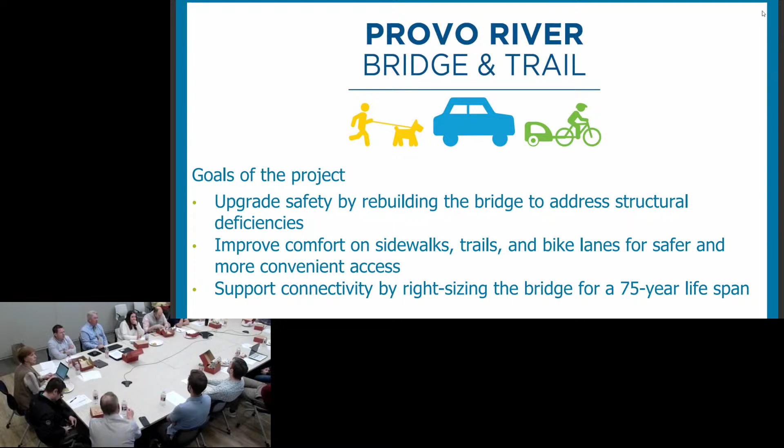So let's get a little background on the Provo River Bridge itself and talk a little bit about our goals. Of course, our goal is to improve safety, right? We have a structure that's deficient and that we need to improve before it falls down. We do need better sidewalks, trails, bike lanes and connectivity. That will improve as well, and we'll talk about some of the deficiencies that exist now. Then we want to right-size the bridge for the 75-year life cycle.

Here's what the Provo River Bridge looks like today. You can see that it is older. Sidewalks are narrow, the parapet's shorter. There are some issues we'll talk about. Constructed in 1960, it's about 80 feet long, 40 feet wide. We took our counters and our average daily traffic is just a little over 11,000, so 11,300. Design life for this bridge is somewhere between 50 and 70 years. We're at 65.

So we're right there. The National Bridge Inventory lists four deficiencies associated with this structure. We have the transition standards, which everybody is very familiar with, the approach guardrails, the bridge guardrail ends, and then deck geometry also is deficient. So we do have some standards that we need to fix, and of course, since this was built in 1960, bridge construction standards have come a long way.

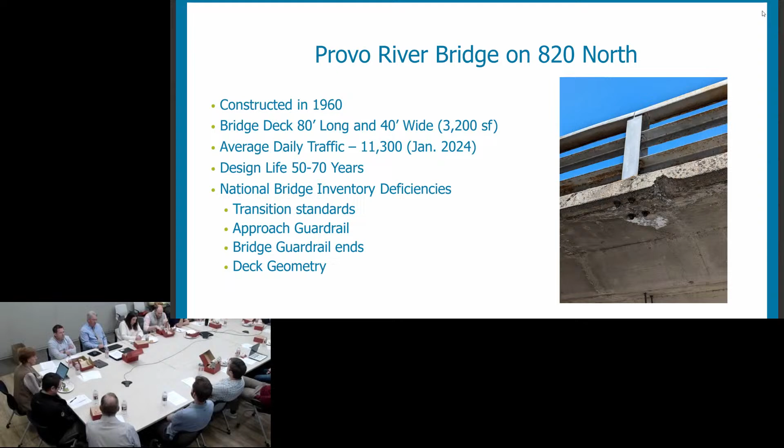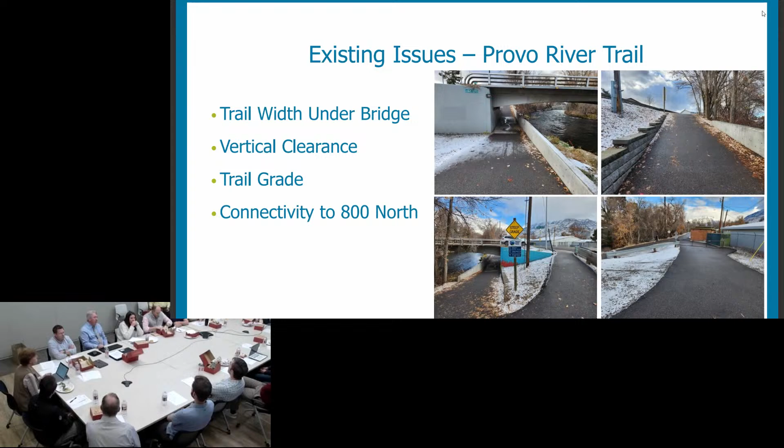Our existing issues with the Provo River Trail: those that use this will recognize that the trail is at its narrowest point when it goes underneath the 820 bridge. The trail is about 8 to 16 feet, depending on where it's at, from the lake all the way up to Provo Canyon. But in this particular case, you can also see the vertical clearance is not good. The trail grade coming up and out of there exceeds the percent that we try to be at, which is less than 8%. And our connectivity to 800 North is not great. So we want to improve those things. Up on top, our sidewalk width is narrow.

Everybody's very much aware of that. The connectivity in a couple locations, especially on the northwest side, does not have any connection whatsoever on the sidewalk. Bike lane width is not meeting our AASHTO standards of 6 feet. Parapet height is low, so someone that's top heavy like me certainly could take a plunge very easily. Weight limit, okay, I'm not there on the weight limit, but anyway, the 31 tons is sufficient that way.

And then sight distance, and I think that's what most people are familiar with, is the sight distance issue. We got a lot of things to balance here. I think Dave's going to talk a little bit about this in a little bit, but between the river itself and not altering the stream, and being able to get the bridge high enough where we have clearance underneath on the trail, and get the bridge where we have good distance and view, all those three things kind of conflict, and there's a couple other things that go with that.

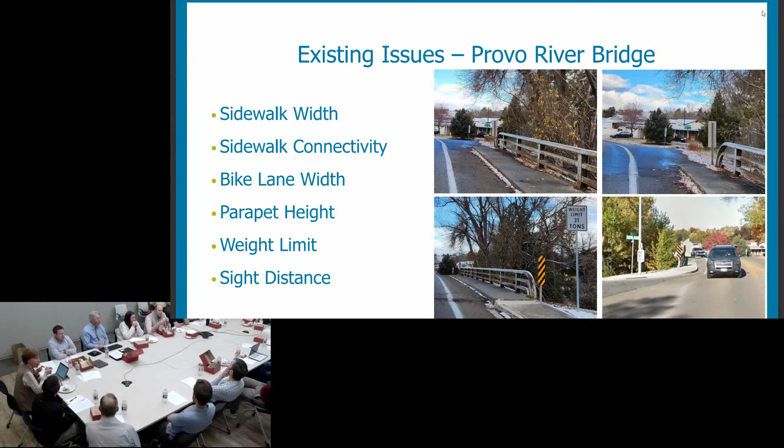So with the sidewalk width on either side of the bridge, there's a total of 5 feet of concrete. But the outside 15 inches is taken up by that big steel parapet. And so the sidewalk is really only 3.5 feet wide. You can't walk next to somebody from there. And then it doesn't connect at all. Like that upper right-hand photo is the northwest side where the sidewalk is. Connectivity. Yeah.

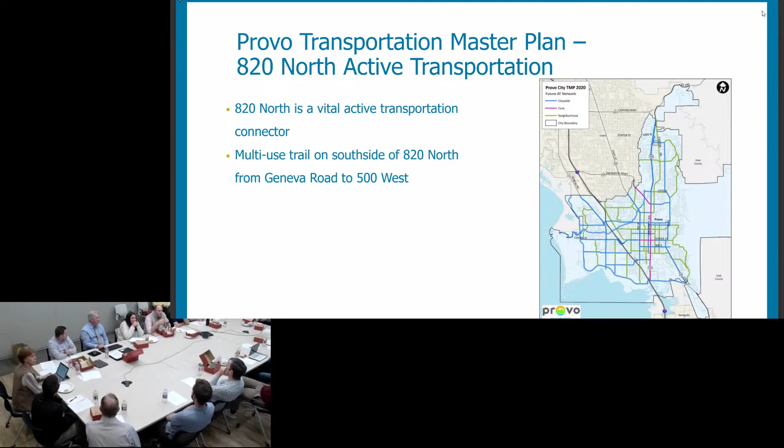Everybody enjoys the Provo River Trail. It is one of the gems of Utah County, right? Not just Provo City, but all of Utah County. It's a gem. And we need to improve that trail through this bottleneck right here. By the way, this section of the trail has over 200,000 trail users a year. It's probably somewhere between maybe 210 and 250,000. Last year, crossing the bridge, we saw about 200 to 210,000, and that was an increase of 23% over the year before. So from '22 to '23, we saw a 23% increase in trail users on this section.

It's a huge number. Thomas, why don't you go ahead and talk about our active transportation users across the river bridge? Yeah, and so the 200 plus thousand are just on the trail right here. And then 820 North itself connects so much from the east to the west, and it has over 100,000 annual users. I don't know the exact number. We've done some counts and we're interpolating it up, but it's a lot. It ends up being about 300 plus a day, and we multiply that times 365, we get about 100,000. But I feel very confident in that number, that there's 100,000 users, bikes and peds, crossing the bridge every year.

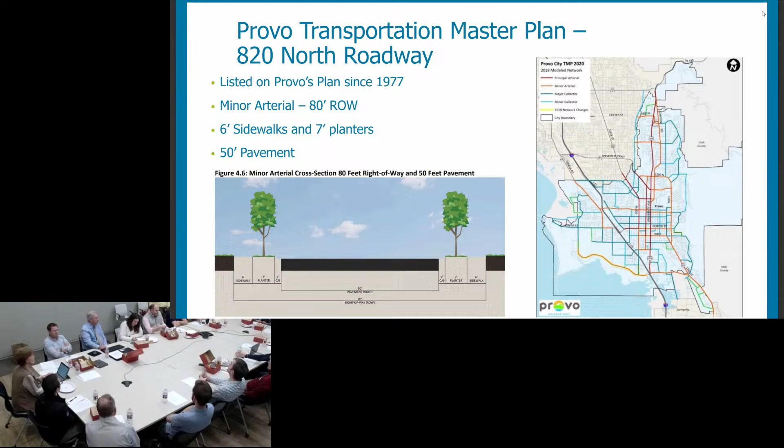So in our transportation master plan, we do have a capital facilities section on 820 North from 5th West to University Avenue. That is planned to be widened. And I will tell you, inflation has taken a hit on us. We've only implemented 20% of our transportation master plan since 2020, when this was adopted. One of the reasons is there's been other priorities in the city. We have a wonderful new airport. We have an epic park that's about to be opened here this fall. And when we see things like that, there's sacrifices that are made. And then inflation really is also a big hit, right?

Some of the bids we're seeing are coming in way over the engineer's cost estimate, even with 25 to 30%. So it will remain in the capital facilities plan. That's the first segment that really needs to be widened. When we get to the rest of it, you'll see 820 North, 950 West to 800 West. That's the bridge. We have funding for that. And then finally, 820 North from Geneva Road to 500 West. That also has a time frame to be determined for widening, but it's way in phase 2. I'll show you in a little bit when that starts to be really needed for increased volume. So, yes, on that one.

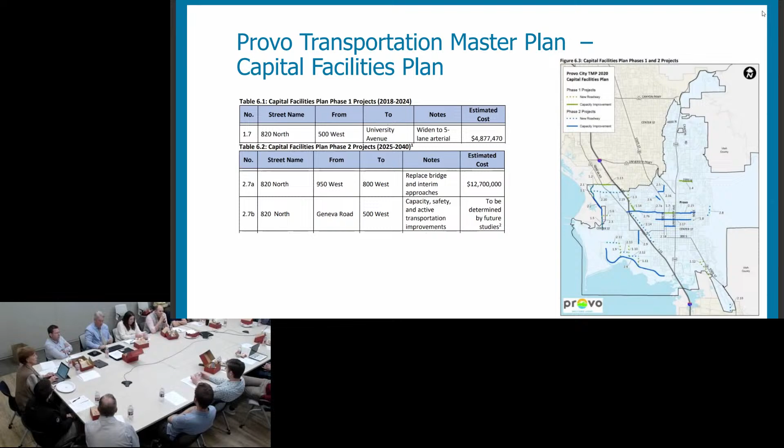So if we go and talk a little bit about the Provo Transportation Master Plan, back in 2000, we developed a plan with livability street standards. And no one else was doing this at the time. In fact, I know no one in the state of Utah that's adopted livability standards in their transportation master plan. They just go by the ITE trip generation. Salt Lake City has it, but they're not part of their master plan. It's a separate little document.

So we explored, we took videos, we tried to show the council and the planning commission at that time what different levels of service looked like on a local street. And the council adopted that, and 1,400 to 1,800 trips per day was deemed acceptable on their local streets. What they did get into a little bit was the arterials. The collectors, we do have a lot of homes fronting on collectors, and we do on arterials too, but the arterials have been there quite some time.

This arterial, 13.5, okay, is the livability street standard for 33,000, right? And so depending on whether that's a major or minor arterial, it really jumps up. And when we look at access spacing, that is really what determines the conflicts. Do we have a lot of driveways? Do we have a lot of public streets, every block accessing 820 North? Or is it limited, like Lakeview Parkway will be?

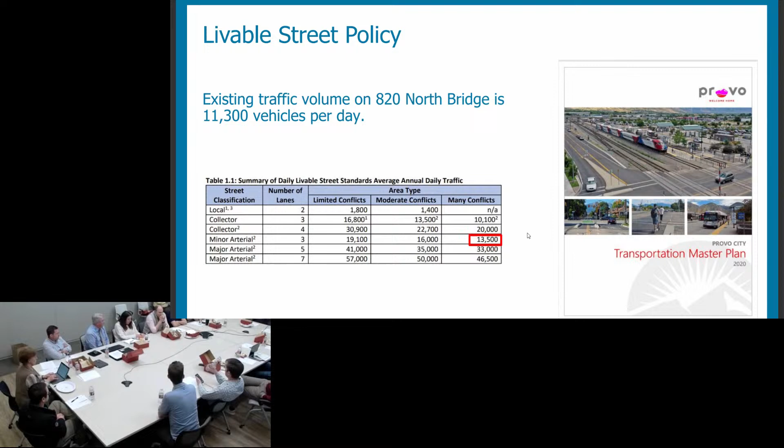So, the big question a lot of people want to know is, what's our traffic growth? What's happening on 800, 820 North in those locations? So, we did traffic counts recently in January. We're over 11,000 vehicles per day, and that's right here at 2024. Growth is continuing to occur on the west side. We have upgraded our sewer system over there, and we're upgrading our sewer treatment plant. And we just put in a lift station over there that will really catch most of the entire west side of I-15. There's going to be growth, and there is growth occurring.

So between Center Street in Provo and 2000 North in Provo, or 2000 South in Orem, the only access under or over I-15 is currently 820. So where are these people going to go? Actually, a lot of us avoid it, and go north or south, and we don't even come to Provo. Some go north up to Parkway, but we all know what Parkway is like. Or some take the back road south up to Orem Center and spend all your money in Orem and not in Provo. And unfortunately, we all know what Center Street design looks like, right?

So when we get up to about 2030, we're probably looking at some livability street standards and pushing the envelope there. 2033 is phase 2 of MAG's long-range plan. Without an interchange, this is kind of the growth that we see with the 5-lane facility. Stays fairly modest, keep it around 20,000 up to 2050. If UDOT, who is yet to do their environmental analysis, decides that 820 is the location to put in the interchange, this is the traffic volume that you experience.

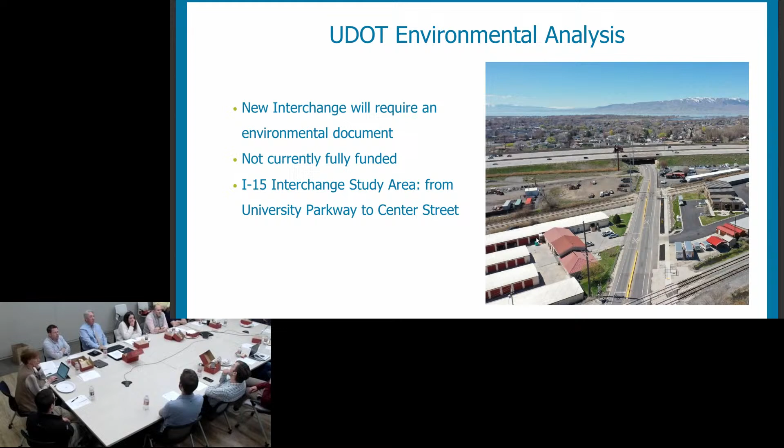So with that, I'm gonna turn it over to Dave, and he's gonna talk a little bit about potential cross sections. So, like Vern showed at the very beginning, this is a prettier picture of what the existing bridge looks like right now. We've got 30 feet of asphalt on top of the bridge, 5-foot sidewalks with 15-inch railings. There's not a lot of room to play with right here. We're well aware of the deficiencies that we're facing here.

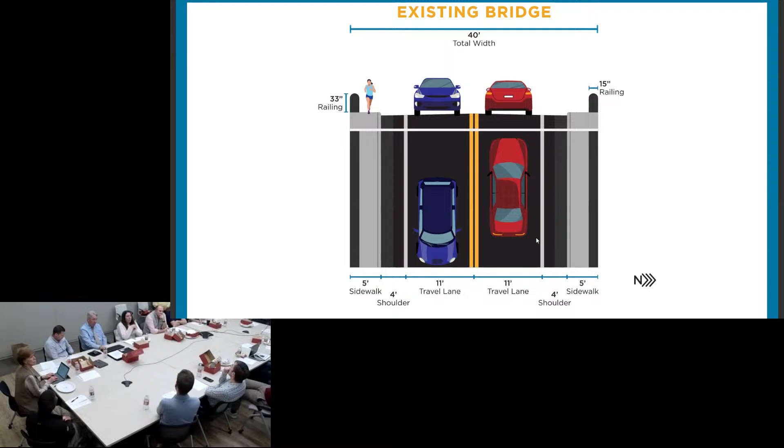If we were to build this size of bridge, in the case of future widenings, we can go to the next one, a potential occurrence may be that we would utilize the remainder of the bridge for 5 lanes of traffic, and be in the position to sacrifice active transportation to prioritize vehicle traffic.

And this would be putting 10-foot lanes for all the travel lanes through here. Why do you need a two-way left turn lane? What's that? Why do you need the turn lane? We're not exactly sure how much space we're gonna need for that, depending on the access to the driveways, in terms of the taper distance. You know, the bridge is also gonna expand its length a little from where it is, so just figuring out how much space we need to be able to turn left on either side. On the bridge itself there's no left turn, but I don't know what that is in the taper distance. It might not be fully free and available for bike lanes, for example.

Can you toggle between the two, this one and the one you have? Absolutely. Why do you have a 10-foot trail on one side and a 6-foot? Yeah, so typically our standard for sidewalk is 6 foot, and that's what we would maintain on the north side. On the south side, we do have in our plan, our transportation master plan, to have a 10-foot trail along that south side. And that goes all the way along the road? Correct. So it's not just the bridge.

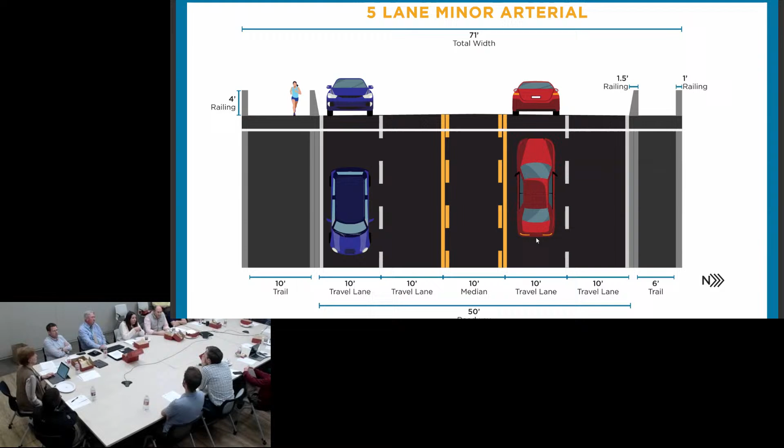Yeah. But then if someone's a commuter on an e-bike, they're saying, let me be on the road. So really, we're accommodating in the first cross section multiple different kinds of active transportation and possibly emerging technologies as well. That's right. Let's go ahead and get to the cross-section that would accommodate everything. So this would be our arterial, Provo City's adopted arterial road section of 78 feet of pavement. And this would allow for 12 foot. Now, this is the widest that we would go, matching the arterial. There is fluff here that we could eliminate to make this a happy medium between the two.

Part of the reason to look at this option is the future, something that we're not determining now. Where we're placing the bridge is to allow for the future alignment of the widening of 820 North to be flexible, where we could push it north, match the existing center line and take both sides, or push it south and take that side. And since that's not being determined at this time, a wider bridge like this provides that flexibility in the future. This would provide comfort and accessibility for all modes of transportation over the bridge. And yes, this is something wide, and we may not need the 5 lane for another 5 to 10 years.

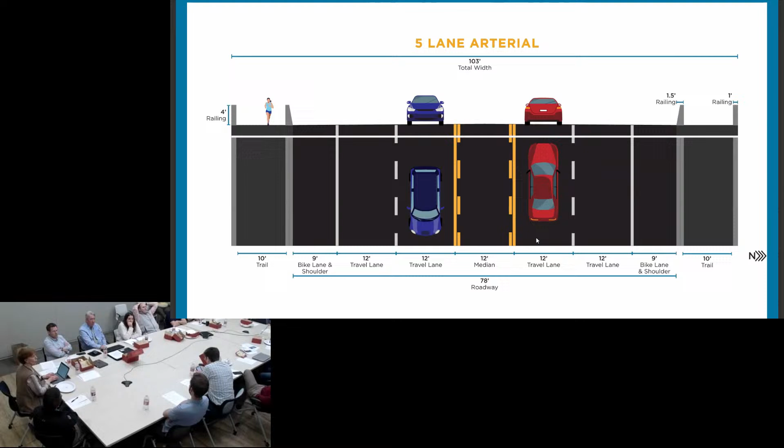And so this cross section, let's go to the next slide. We can pop back here, but this bridge could be transitional. Can I stand up in this meeting? Yeah, I'll just talk about it. Wait. Can't use the laser pointer, they won't work on it.

So if we were to use a wider bridge section here, what we would do in the interim, and this is why this bridge could be, we'll say, semi-permanent. It could be here for 10 years until we widen, or it could be here for 30 years. But doing something like this provides the flexibility of leaving something in place for that time. So we would put in safety barriers that would reduce that roadway section over the bridge. Rather than it being so wide and feeling like a sea of asphalt, the road would feel as it is now, very narrow and not providing that excess space.

In that excess space, we would look at putting seating on the bridge or planters or bike racks or other facilities that haven't been determined yet, but it's something we could utilize to beautify the bridge in the short term, whether that's 10 or 30 years, whenever that widening would occur. It gives us the flexibility to do something beautiful in the interim. That's yet to be determined, but it's something we are considering if we go with this wider bridge.

I'm guessing you've looked at costs on both. I'm guessing it's not linear. We haven't looked at costs yet because of the process we're taking with this, taking public comment and whatnot. I will start the process with my structural team next week to look at some high-level cost estimates. When we applied for MAG funding, we applied for the full, it was actually 90 feet of pavement for the bridge. So we believe even with inflation we'll probably be covered with the funding we have for a bridge this wide. But that has not been determined yet.

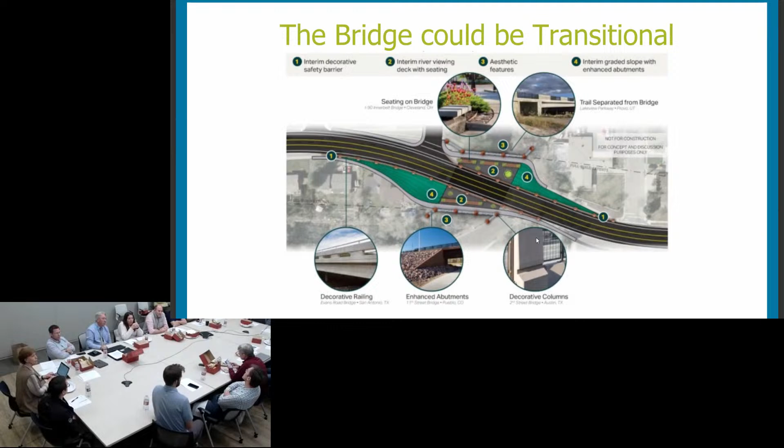Yeah, so this is a concept from our consultant. This is not one of our concepts. This is just where they put the bridge structure. So let's move forward 2 slides, Vern, and we'll look at some potential... So like I said, we're looking at options to keep flexibility for the road in the future, but let's just move on from that.

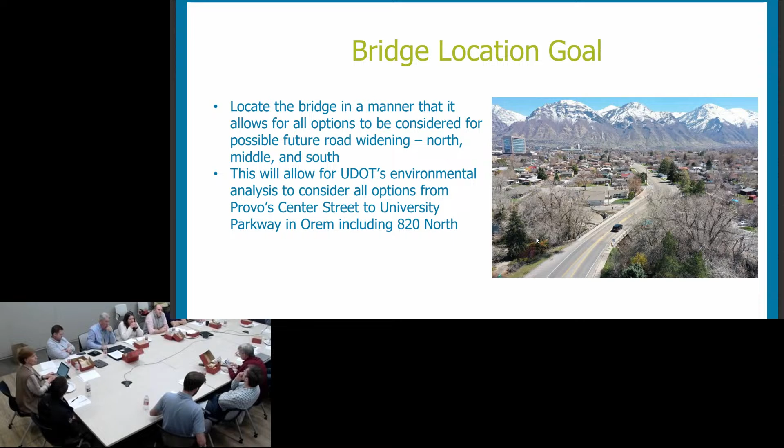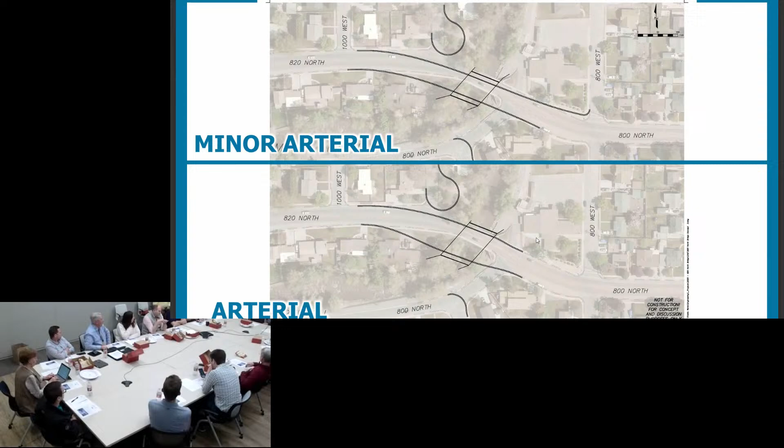So you guys are probably some of the first people to see this discussion on the 820 bridge. We're just starting to roll this out and start to have the discussion. As part of the work that the city is doing, that includes doing public outreach. So we want to start sharing this information with the public. We're talking to you guys, we're going to go to the planning commission soon and others. And so we want to listen to people's ideas.

We want to be proactive about information that we can share and be as transparent about everything that we're looking at. Because we are aware that there will be those exact concerns that you're voicing about what's going to happen to the neighborhoods and the streets. So we do have a plan to work through that. Our first is informing stakeholders. You guys are the TMAC, you're kind of seeing this.

So over the rest of April and into May, we're going to be going out and having some meetings where we share the same presentation, walking through why the bridge needs to be replaced and those types of things. And then from the spring going into the summer, we're going to work on neighborhood outreach. So besides meeting with neighbors and neighborhoods, we're also going to be attending pop-up events and ultimately scheduling a big public meeting, a big open house. That might be this summer. We already talked about maybe there's some value in waiting until school starts so more people can come and participate and see everything we're looking at with the bridge.